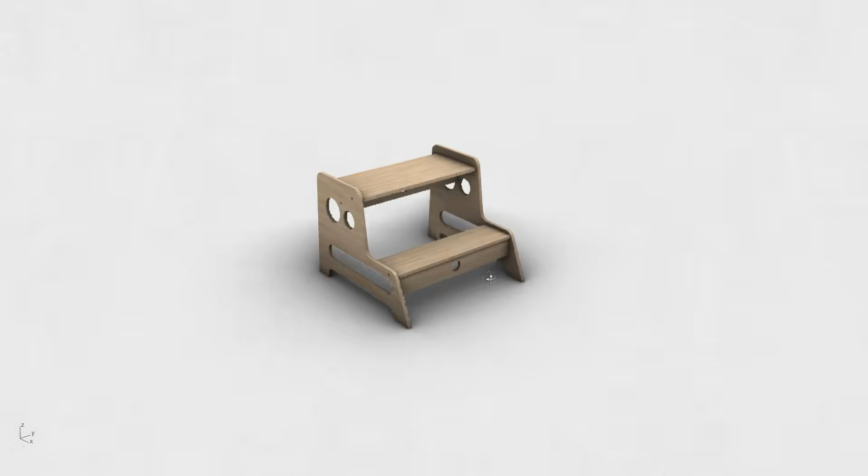Hey there! In this video, we're diving into something super exciting, modeling 3 awesome examples of flat pack furniture. Furniture where every piece is crafted with laser or CNC cuts from materials like plywood or metal, and then they come together without any extra hassle.

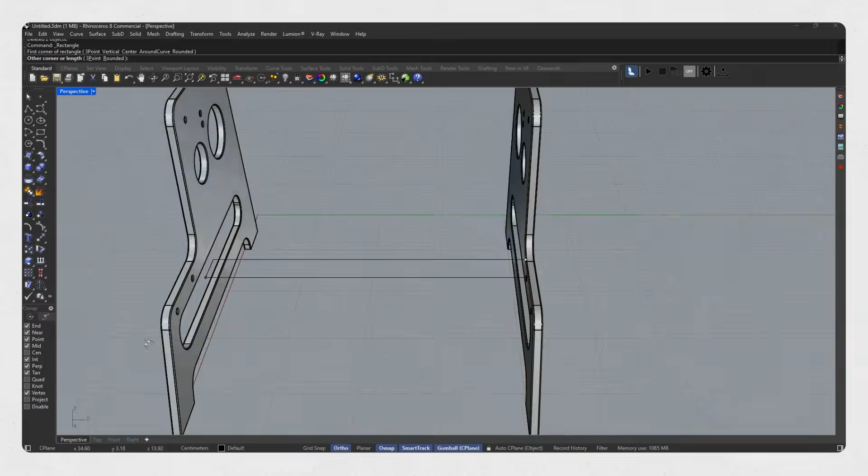We're going to take it step by step, modeling each of the 3 designs in all their glory, from the main shapes to where the joints go, and even the screws themselves. You'll see exactly how this type of furniture is designed and simulated. If you're into industrial design, architecture, fabrication, or precise modeling, this video is just for you. So, as always, stick with me and let's build these 3 cool models together from start to finish.

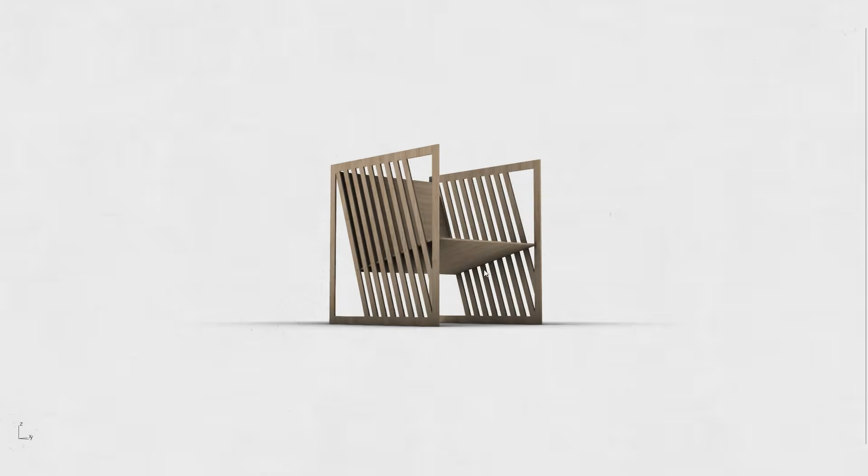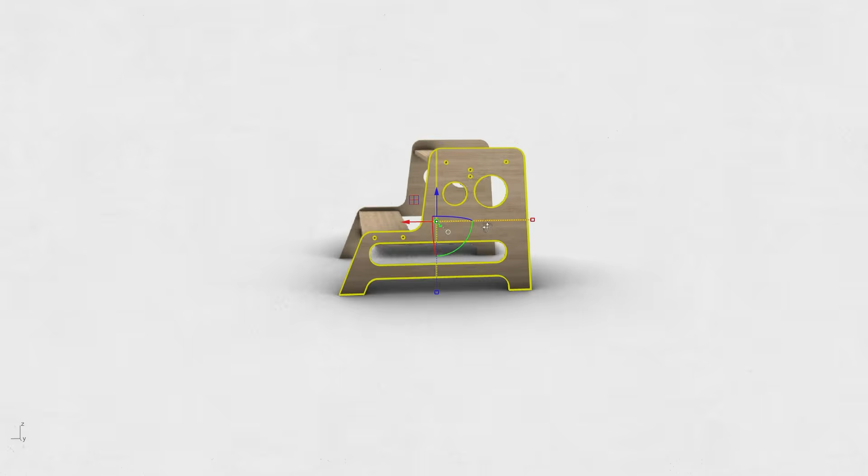In this video, we're going to model a few simple but super useful pieces of furniture together. Things like a small stool, a wall-mounted shelf, and a compact furniture. The models themselves are straightforward, but here's the catch: we're not just creating the overall shape. This time, we're going to include as many real-world construction details as possible. That means screw locations, holes, joints, and even the screws themselves. So the final result is a fully accurate model that's very close to how the actual furniture would be built.

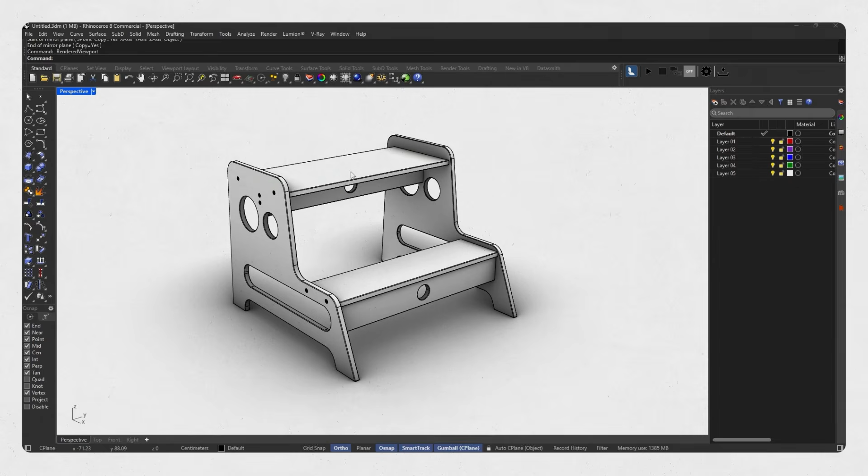Before we jump into the hands-on part, let me quickly talk about the idea of flat pack furniture, because understanding it really helps with the modeling process. Flat pack furniture refers to pieces that are manufactured and packaged as separate flat components, which the user later assembles on site. This approach has several major advantages. It reduces shipping costs and hassle, makes packaging much more compact, and even allows you to customize or replace certain parts. Because of these benefits, flat pack designs are perfect for small spaces, modern homes, and large-scale production.

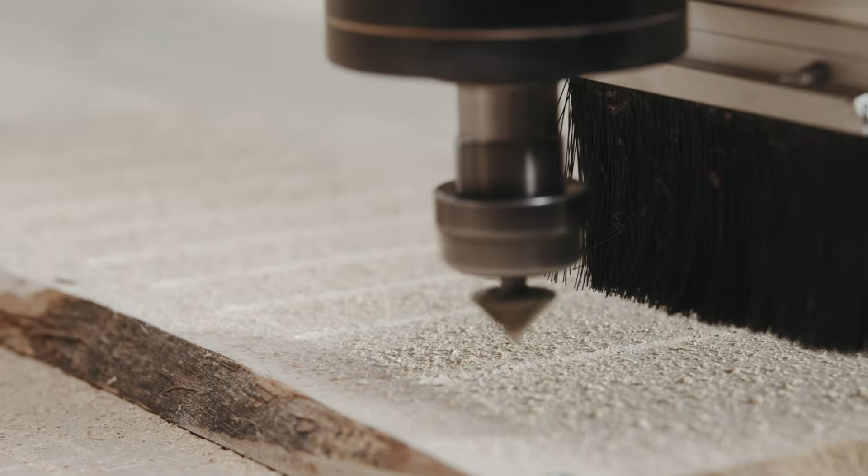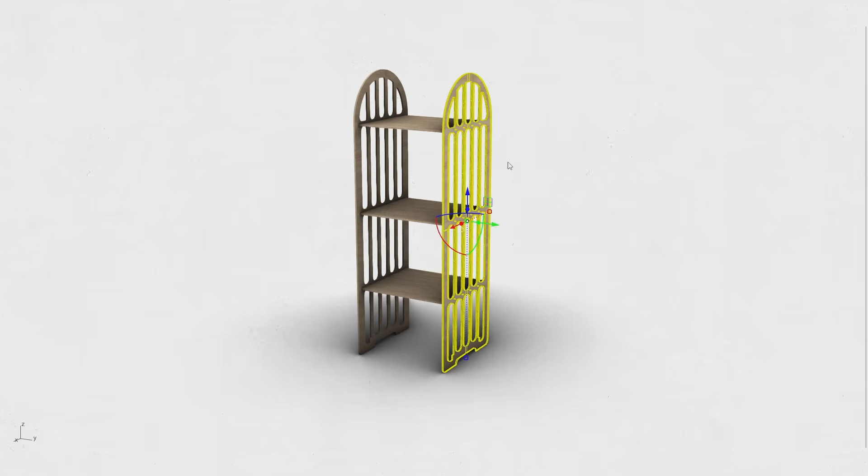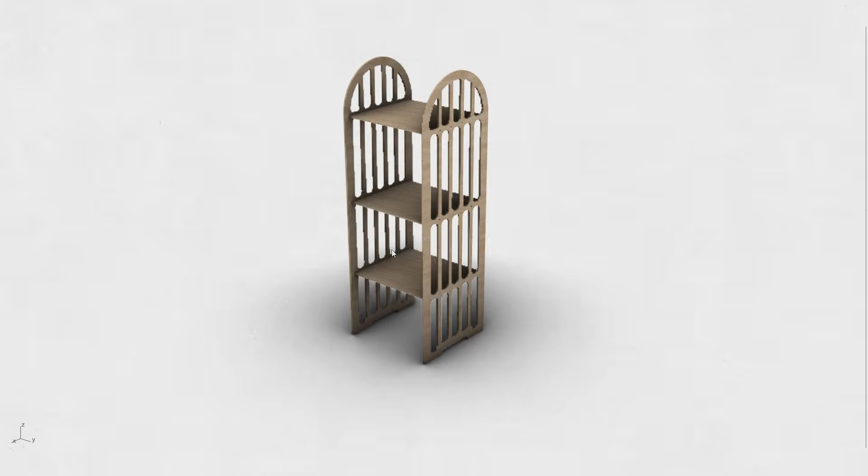These kinds of products are usually made using precise 2D cuts on materials like plywood, MDF, metal, or engineered plastics. Tools like laser cutters and CNC machines prepare the components with high accuracy, so when it's time to assemble, everything fits together like a perfect puzzle, often without the need for any complicated tools. This clever combination of 2D fabrication and 3D assembly is what makes flat pack furniture one of the most efficient and economical ways to produce functional designs. Alright, without further delay, let's get started.

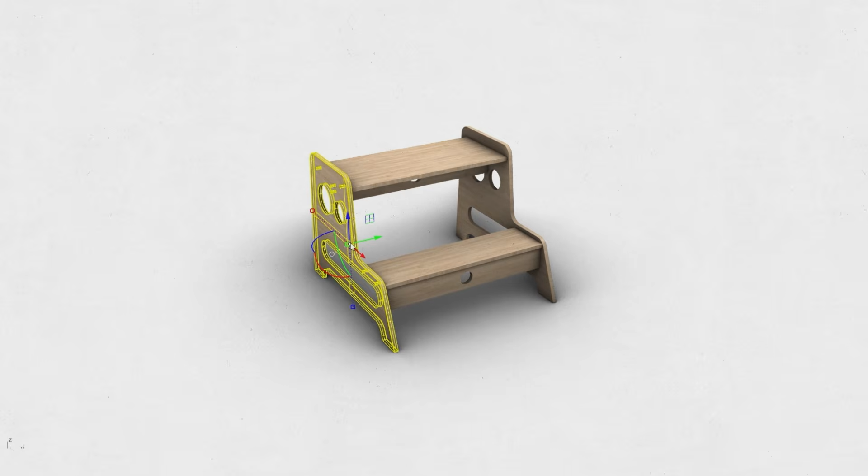Alright, let's jump into the first exercise of this session. The model we're going to build is a Toddler Step Stool, a small children's stool that's designed and manufactured in a flat pack style. As long-time viewers of the channel already know, there are 2 important principles we always keep in mind before starting any modeling process: don't panic, and simplify the form in your mind. Fortunately, this model isn't intimidating at all. The overall shape is very straightforward, and especially for those of you who've already tackled much more complex challenges in previous videos, this one will be totally manageable.

This model has 2 identical side members, plus a few inner pieces that make up the steps. So we'll begin with the sides. I start by using the polyline tool to trace the overall section of the side panel, exactly what you're seeing on the screen.

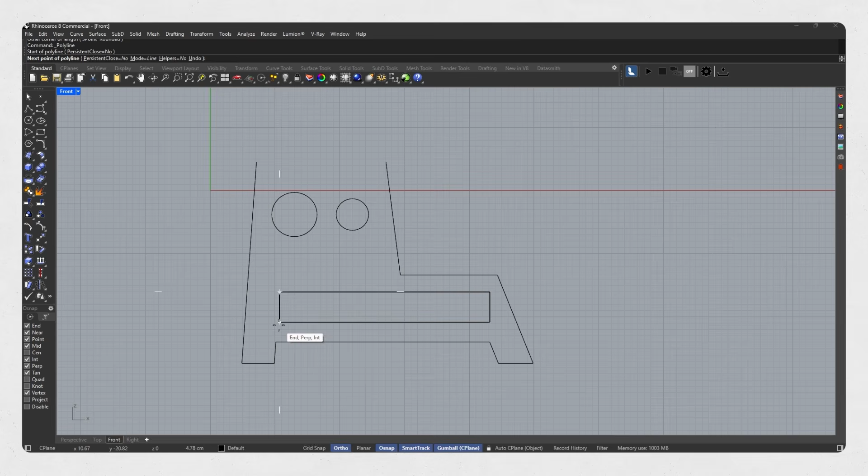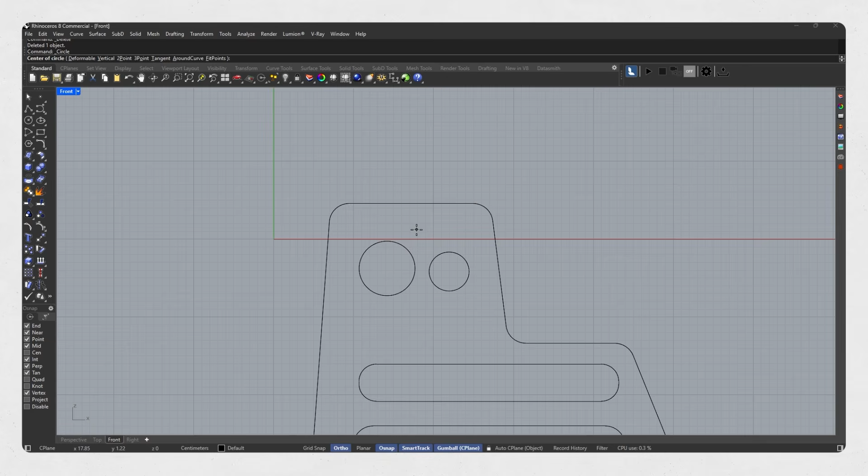Once the shape is drawn, I soften the corners with a small fillet to make it look a bit more realistic. At this stage, I also mark the screw holes because these little details make a big difference in the final quality of the model.

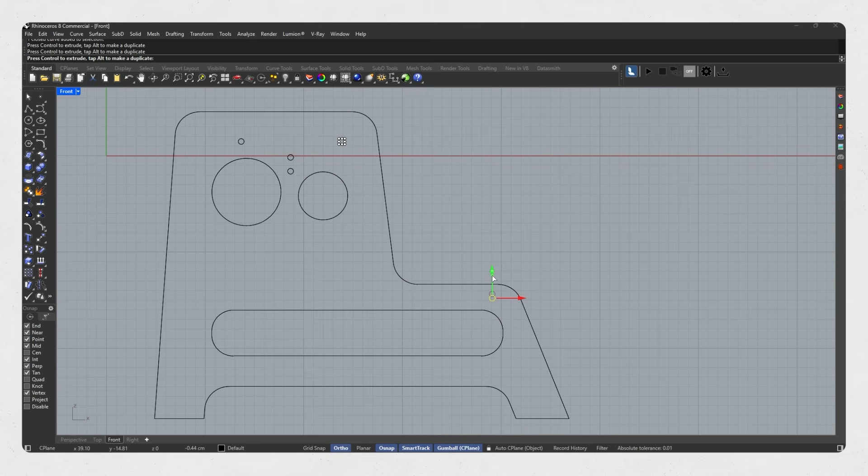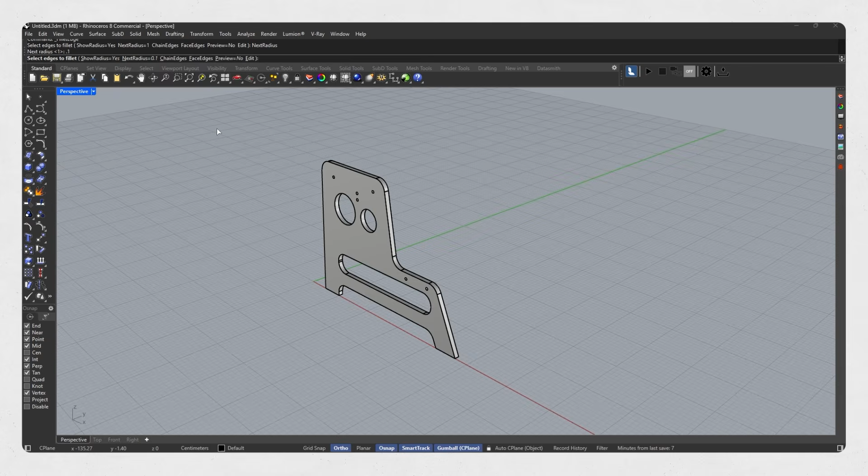When everything looks good, I use Extrude Curve to give the piece its thickness. Then I apply a very small fillet edge along the edges. For example, if the panel is 1 centimeter thick, a fillet of about 1 millimeter is perfectly enough and looks natural. These subtle fillets have a huge impact on how realistic the model feels. Now that one side panel is ready, I hold Alt, drag the gumball, and create a copy, placing it on the opposite side, exactly as you see here.

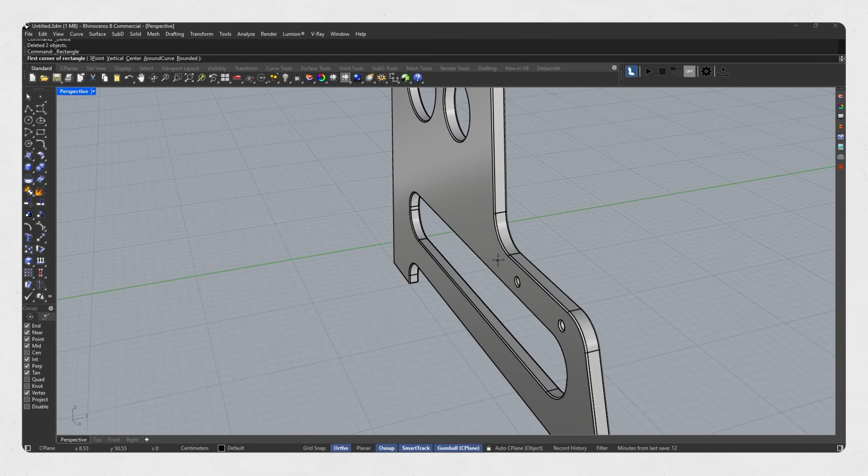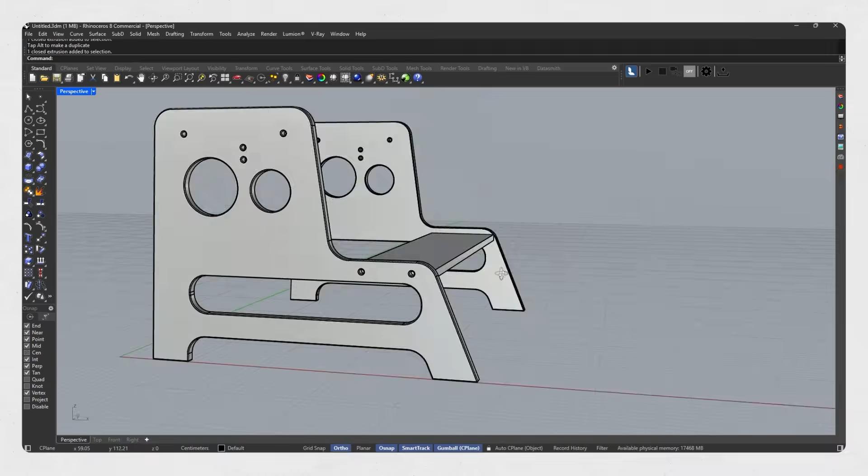Now let's move on to the middle pieces. Just like before, I start by drawing the cross sections of the middle parts based on the reference image, and then I extrude them. The logic here is very straightforward: the length of these pieces should match the exact distance we established between the 2 side panels. With the help of OSnap, it's easy to pick the key points accurately and avoid any mistakes.

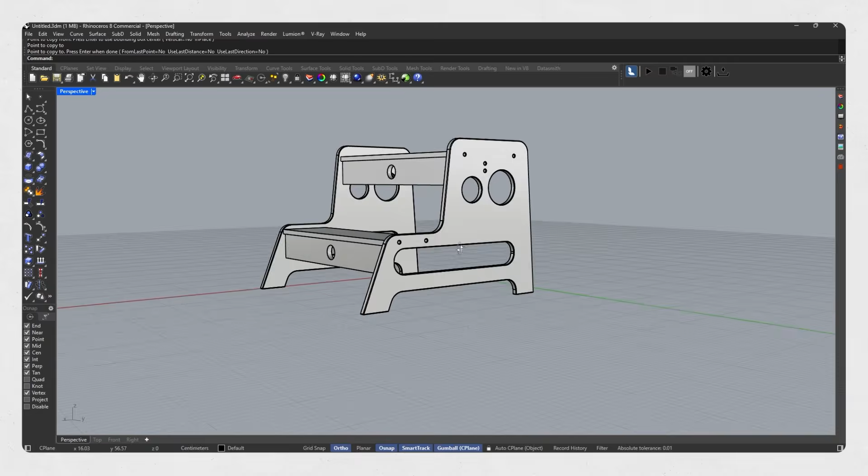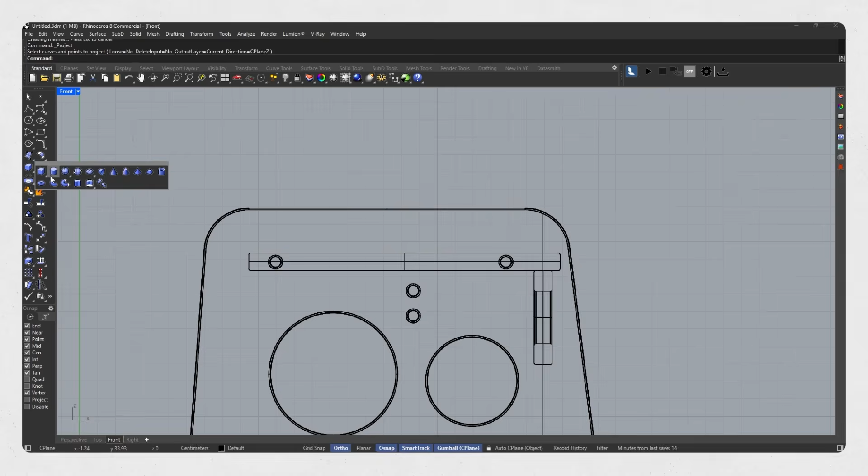Again, I add small fillets to the edges, so the model doesn't look overly sharp or artificial. Next, to create the screw hole locations on the middle pieces, I draw a small cylinder, position it slightly inside the geometry, and use Boolean difference to cut out the holes, just like you would see in a real manufactured product.

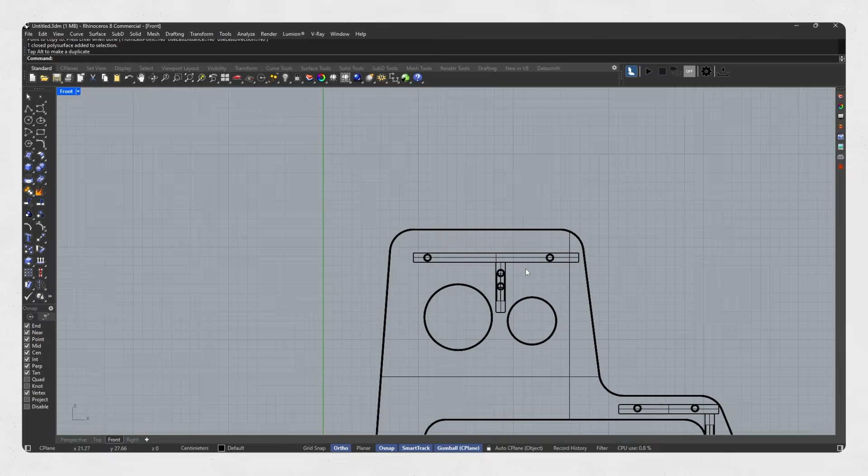I then finish the remaining details exactly as shown in the reference. Alright, now we get to the fun part, modeling the screws. First, I draw the screw profile to the specified dimensions, then use the Revolve command around the screw's central axis to create the main body.

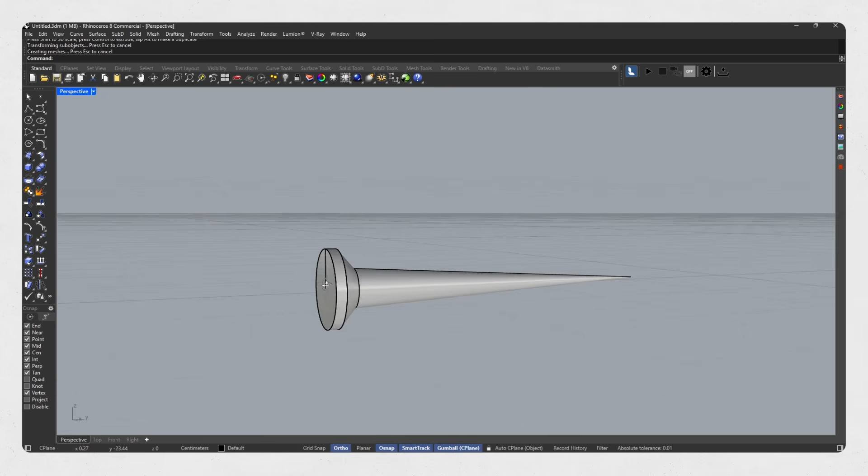To make the screwdriver slot on the screw head, I model 2 small boxes perpendicular to each other to form a plus shape, then Boolean union them into a single piece. I position that piece on the screw head and use Boolean difference to subtract it, which creates the screwdriver slot.

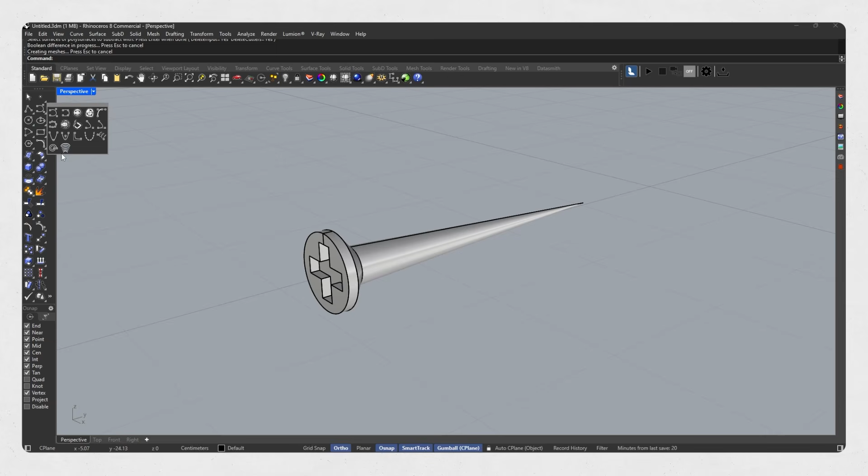Next, it's time to model the threads. I draw a spiral and extract the 2 main contours from the screw surface. I offset the helix, rebuild the curves for smoothness, and loft between them to create the thread surface.

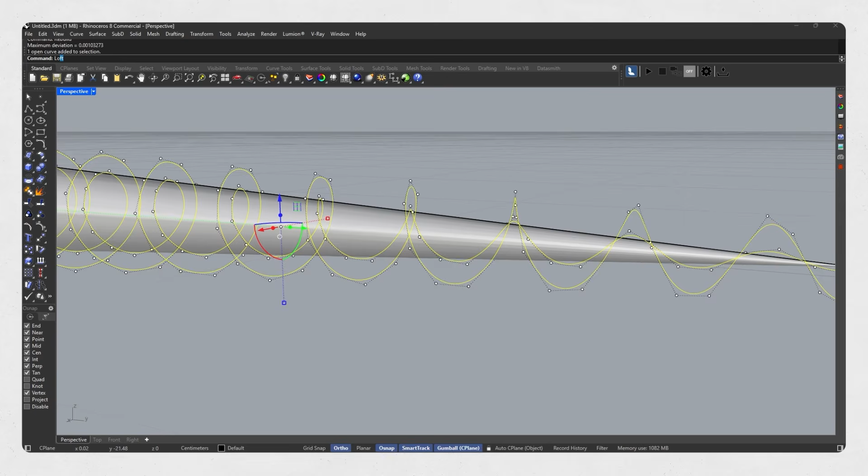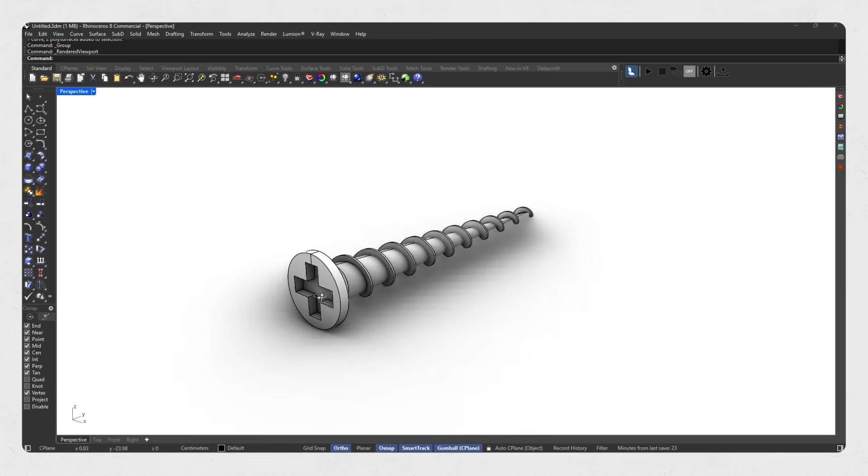Finally, I give that surface thickness using offset surface. At the end, I Boolean union all the screw parts so the screw becomes a single solid object. Now the screw is ready, I make several copies and place them carefully into their locations on the model.

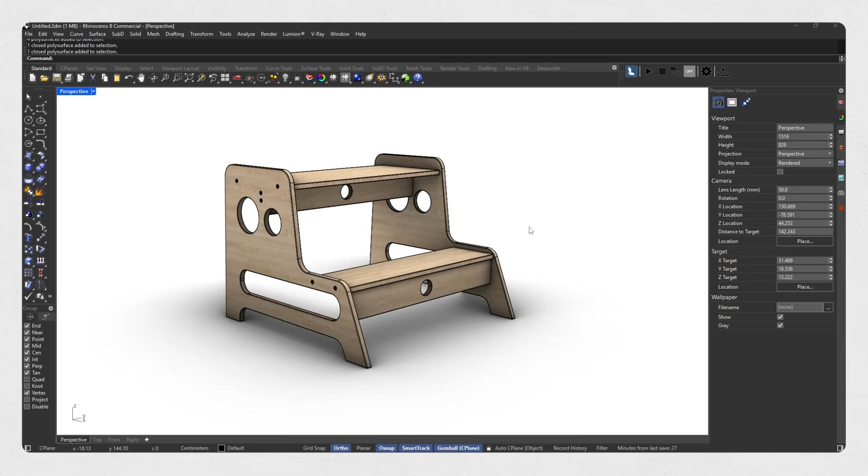And that wraps up the first exercise. If you're ready, let's move on to the next one.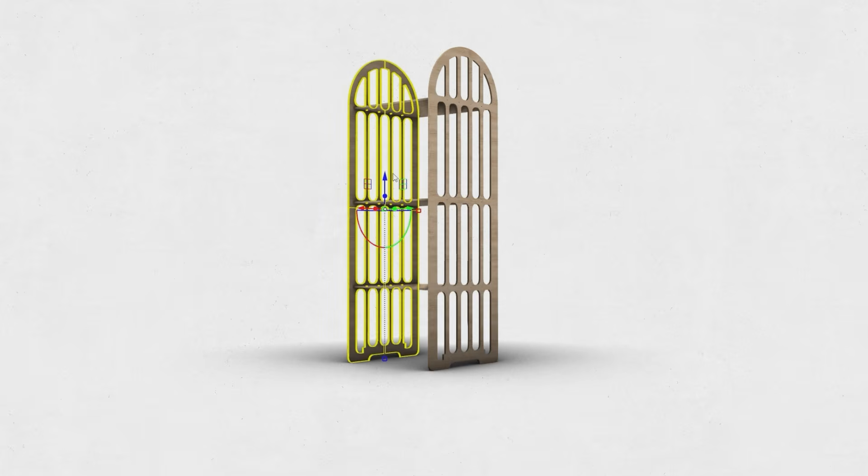Moving on to exercise 2, this time we're going to model a simple shelf or niche that, just like real flat pack examples, is made of a few flat pieces and assembled with screws. The workflow, in terms of logic and sequence, is exactly the same as the previous exercise. So I'll just quickly review the parts we already learned to save you some time, but the modeling process is exactly the same as what we did with the step stool.

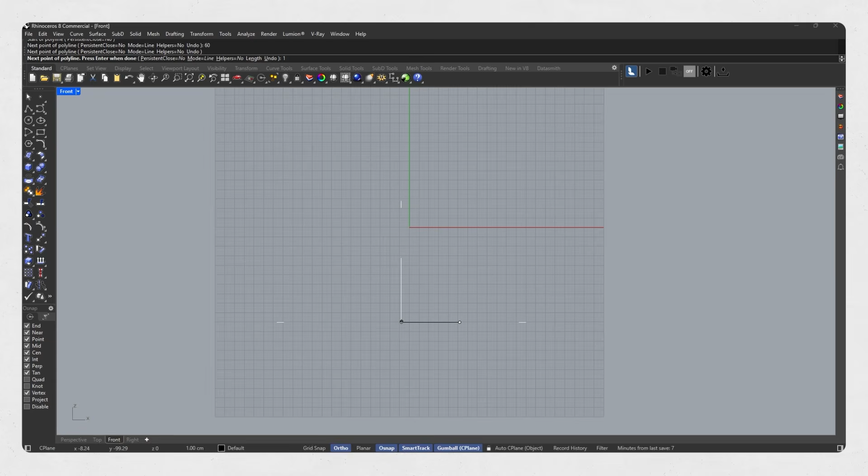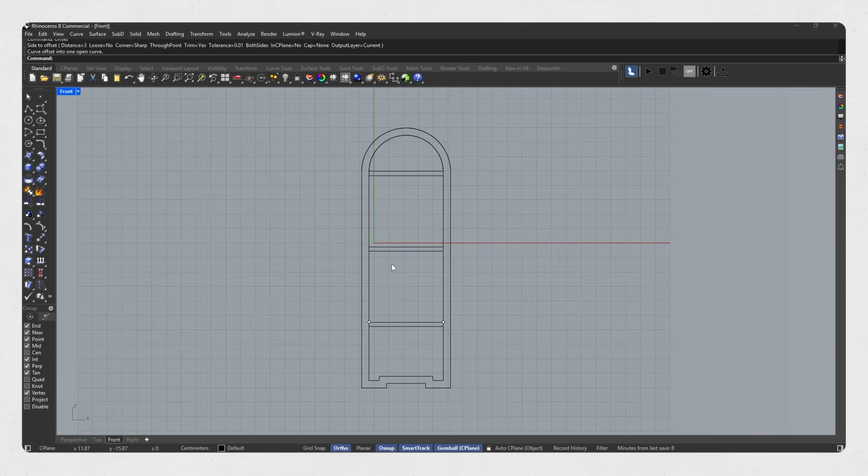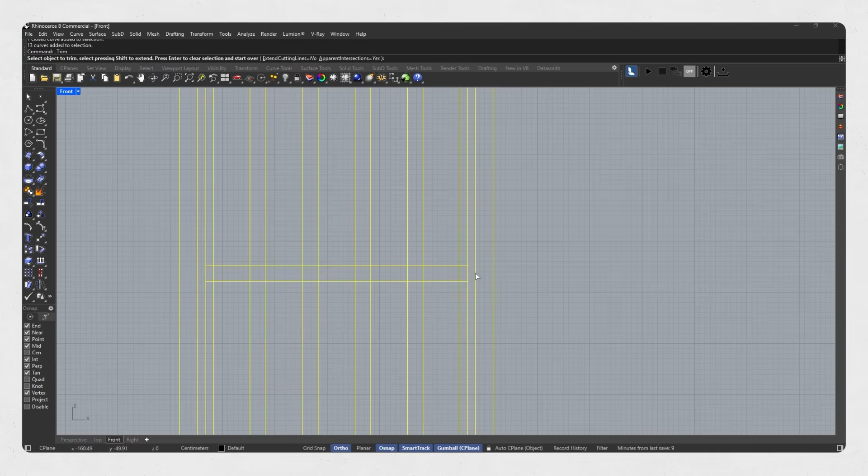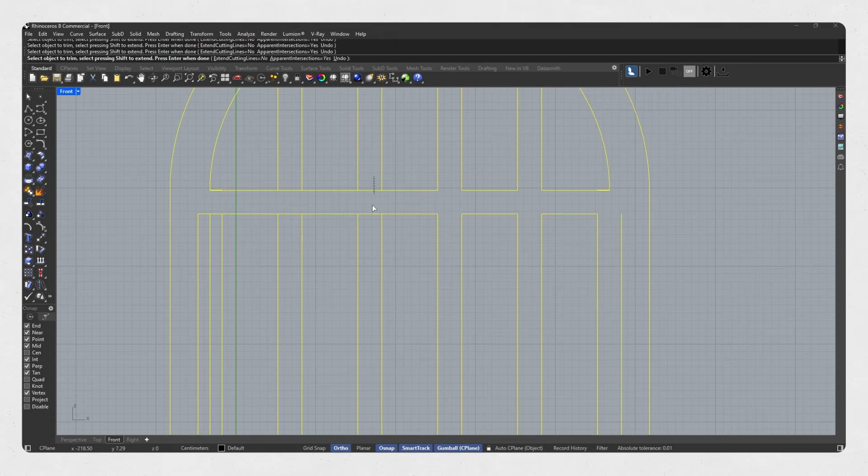Just like in the previous exercise, we begin with the side pieces. As you can see on the screen, I use the polyline tool to draw the side. I round the edges with a fillet and also mark the screw holes. Exactly the same method we used in exercise 1, so I won't go into the repetitive details.

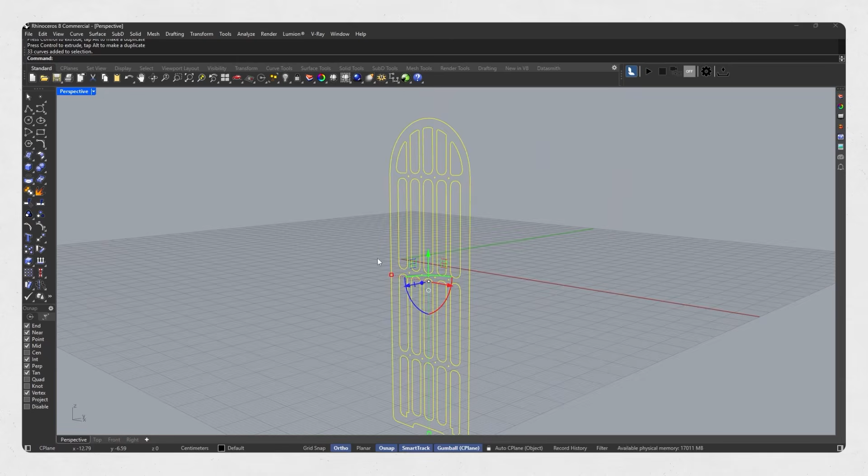Once the side shape is complete, I give it thickness using Extrude Curve. Finally, I apply a light fillet edge along the edges to take it out of the raw state and give it a more natural look.

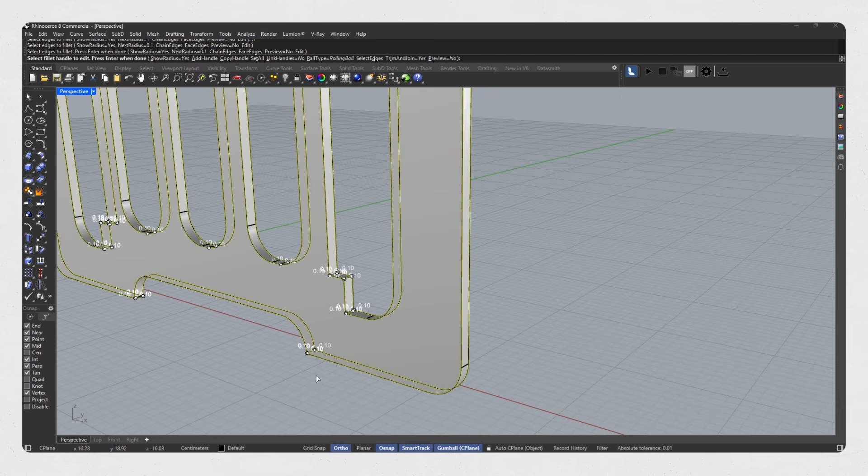Then, as always, I hold Alt and move the gumball to create a copy of the side, placing it at the desired distance so the main shelf form starts to take shape.

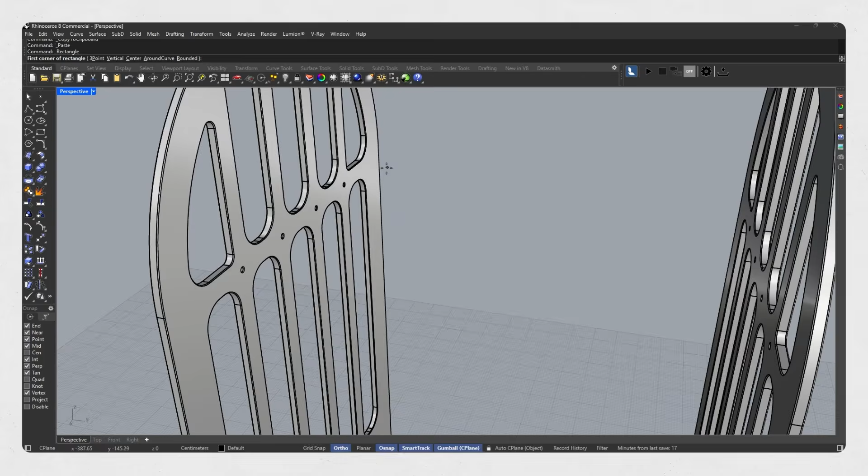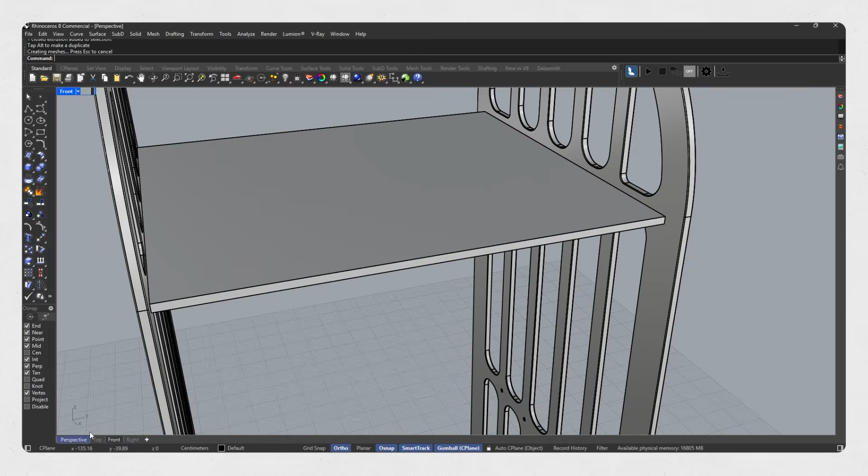Now it's time for the inner pieces that make up the inside surfaces of the shelf. The process here is similar to the previous exercise. I draw the cross-section of each piece according to the reference image, give it thickness using Extrude, and adjust the length of the piece based on the distance between the two side panels using Osnap to make sure it's accurate. Then I apply a fillet to the edges to take away the sharpness and give it a smoother, more natural form.

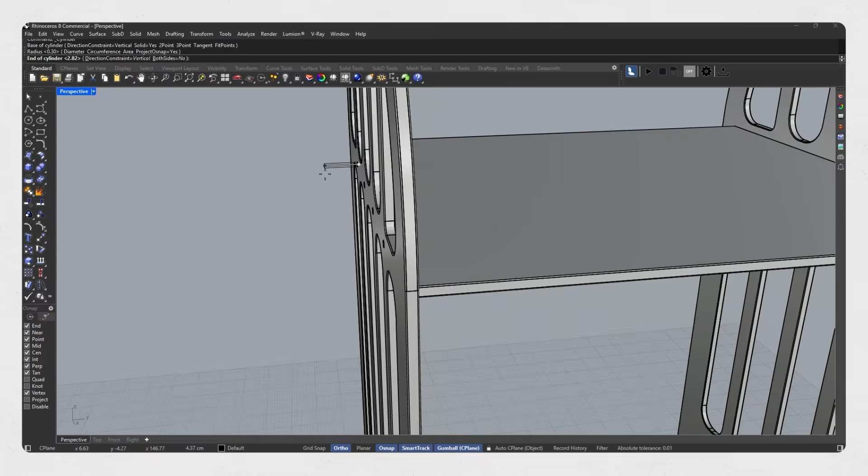I place each piece in its proper position, one by one, until the skeleton of the shelf is complete.

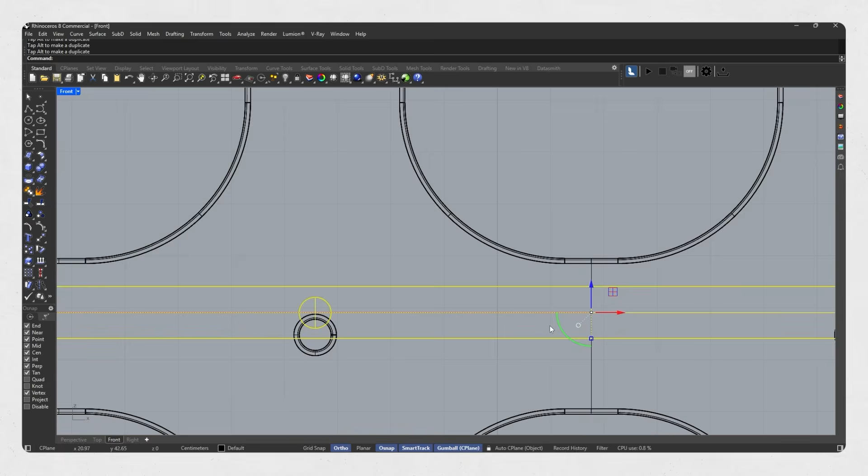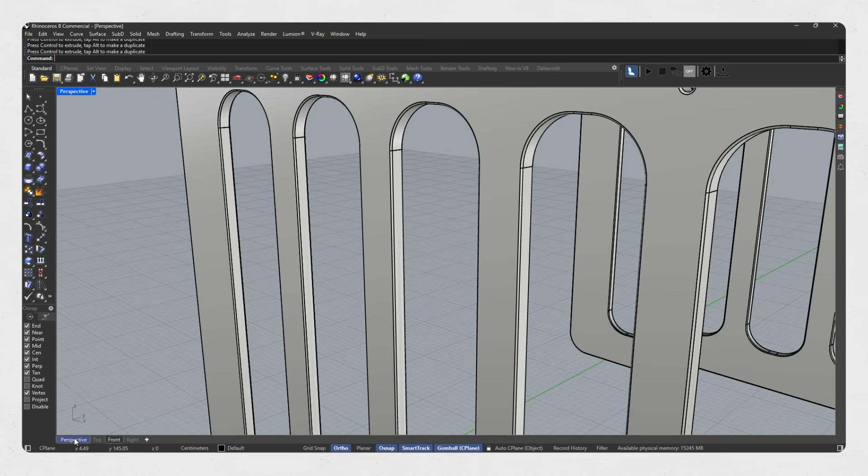Since we fully modelled the screws in the previous exercise, there's no need to recreate them here. We simply use the pre-made screws, make copies of them, then, following the connection points on the side panels and inner pieces, I place them carefully in their correct positions. This step goes much faster because the connection structure is simpler than it was for the step stool.

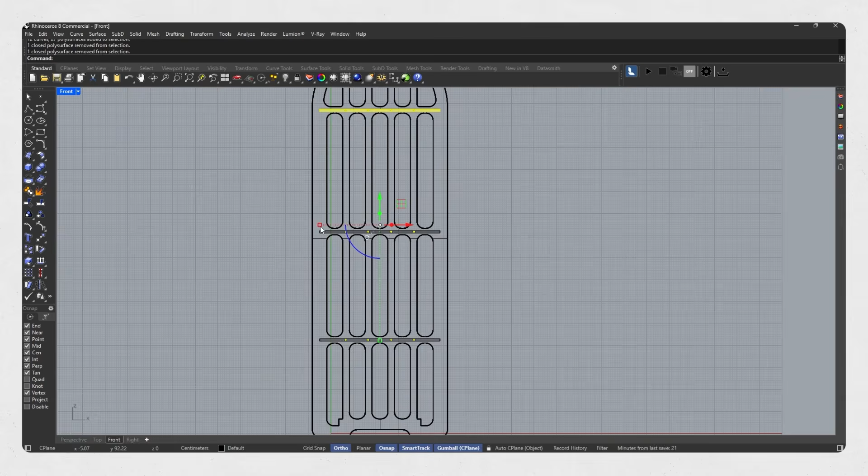At the end, just like in the previous exercise, I apply appropriate materials to the shelf pieces to make the model look cleaner and more realistic. And that wraps up exercise 2 successfully.

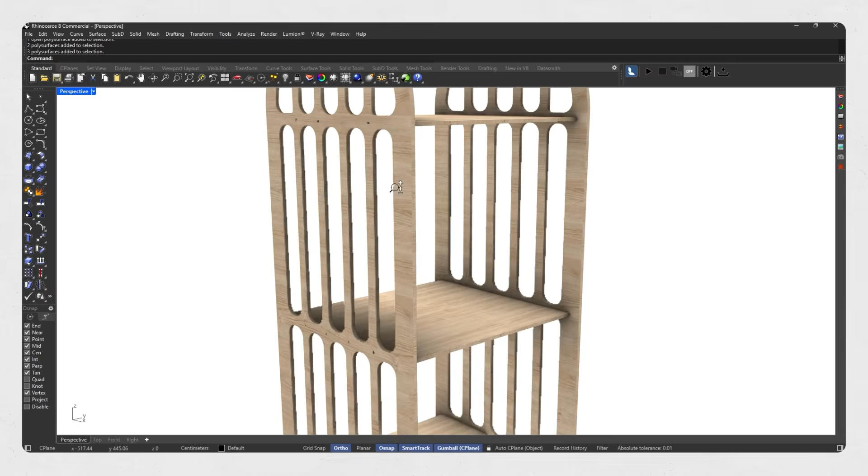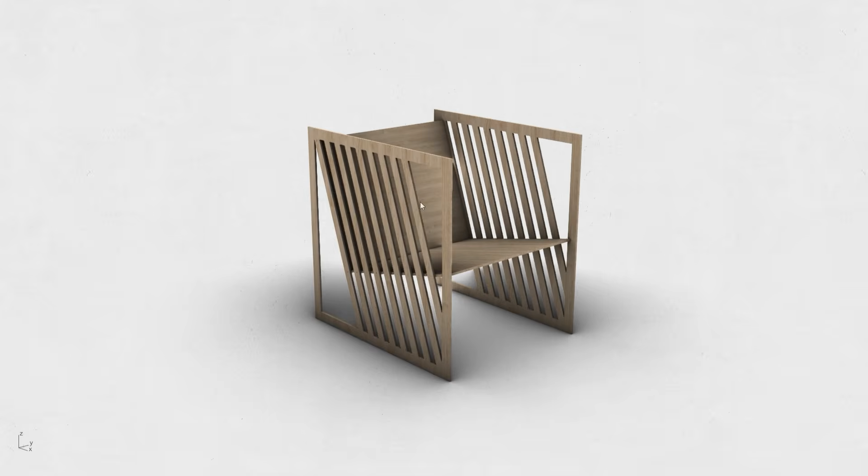Moving on to exercise 3. This model, like the previous two exercises, is a flat pack furniture piece, and the overall workflow isn't fundamentally different. However, it has a few smaller, finer details that make the final result look more realistic.

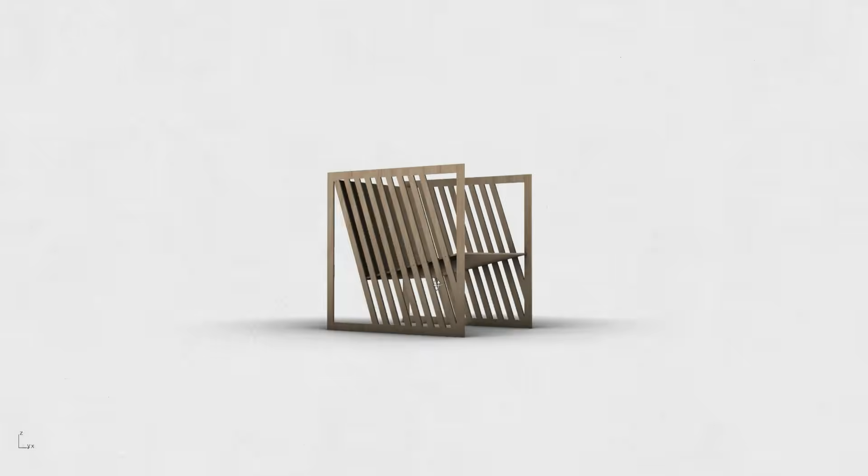As always, we start with the side of the furniture. As you can see on the screen, I first draw the side's cross-section, then I give it the desired thickness with extrude.

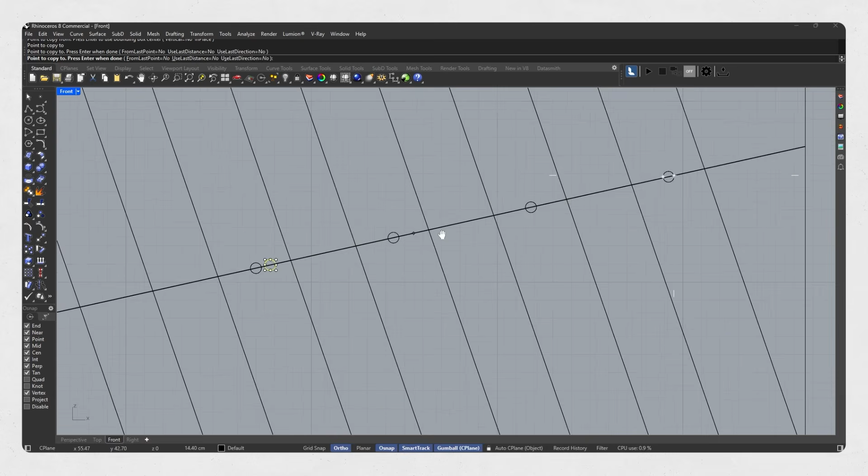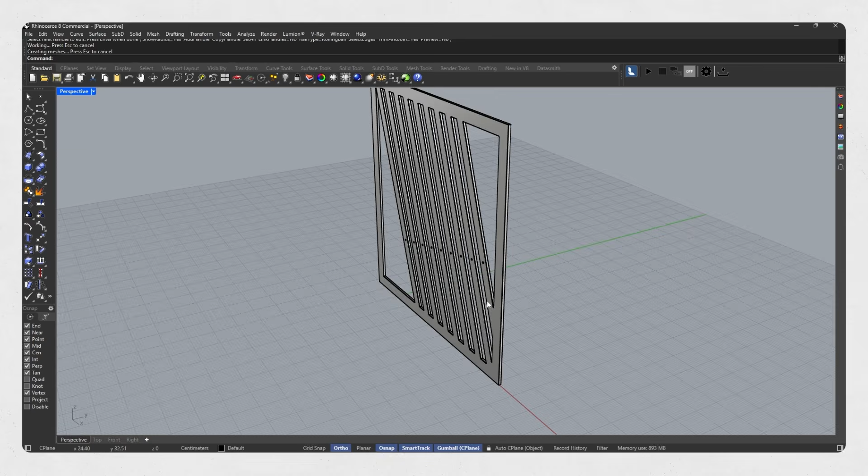Next, I move on to the initial details, rounding the edges with fillet edge, fixing sharp corners, and marking areas that will later be used for connections. Once the first side is complete, just like in the previous exercises, I hold Alt and use the gumball to create a copy, placing it at the appropriate distance for the width of the furniture.

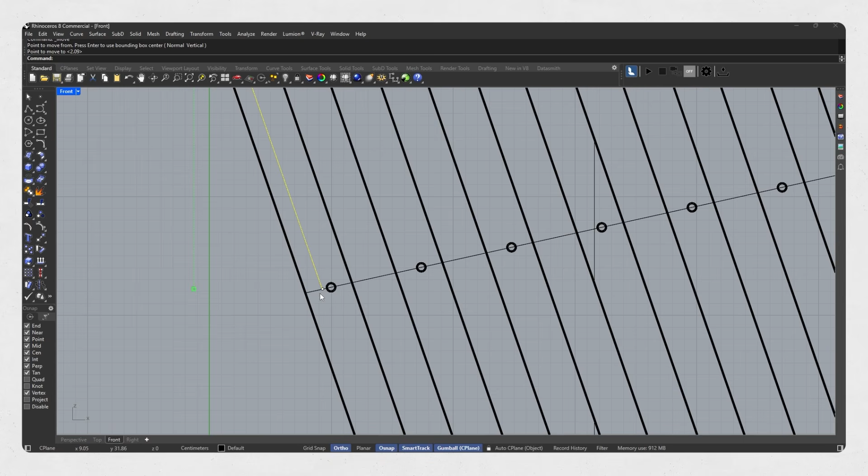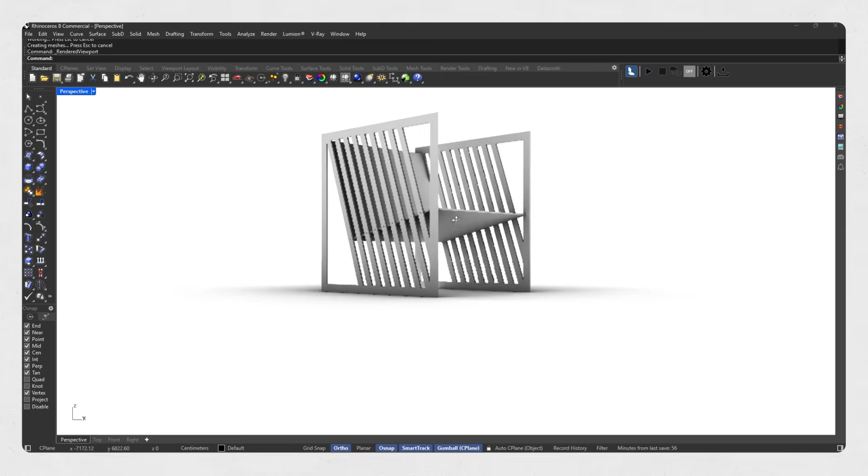Now we move on to the inner pieces, the parts that complete the main form of the furniture. The process is the same as before. I draw the cross-section of each piece, give it thickness using Extrude Curve, apply fillet to the edges, and finally adjust their orientation so they fit correctly between the two side panels. This step may require a bit more precise rotation or positioning, depending on the furniture design, but using Osnap and the gumball makes it very easy.

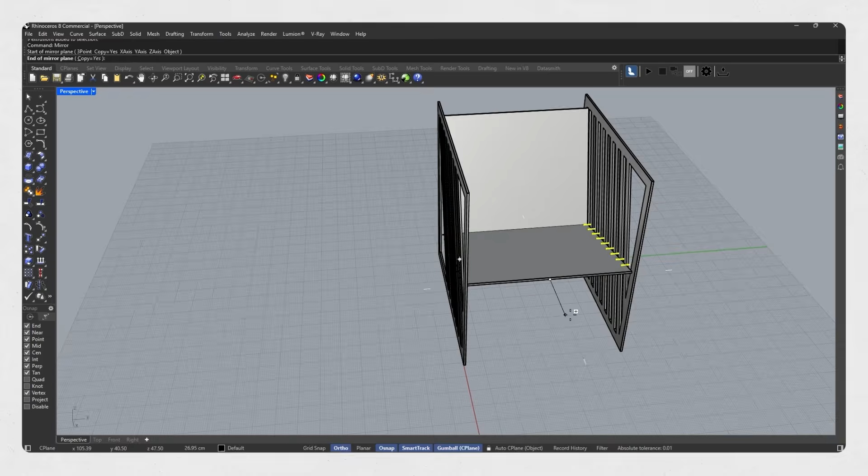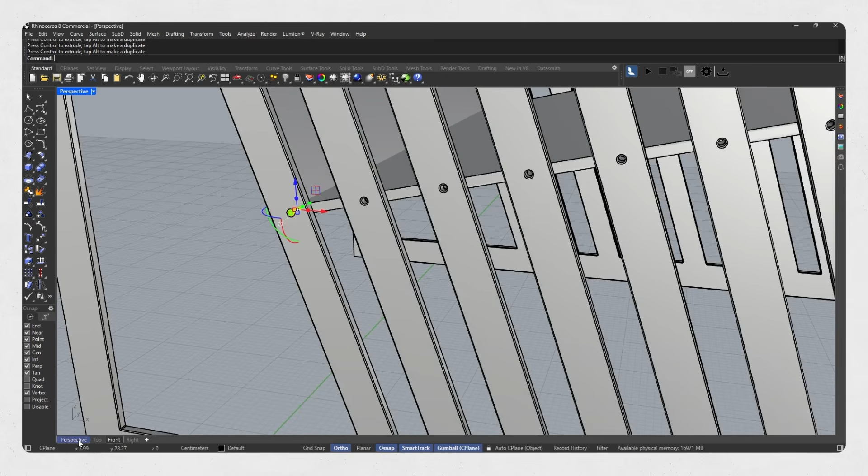At this stage, just like in the previous exercises, I use the pre-made screws that we modelled at the beginning of the video. All I need to do is make a few copies and place them very precisely at the connection points marked on the side panels and inner pieces. This not only makes the model look more realistic, but also gives the final render a more professional touch.

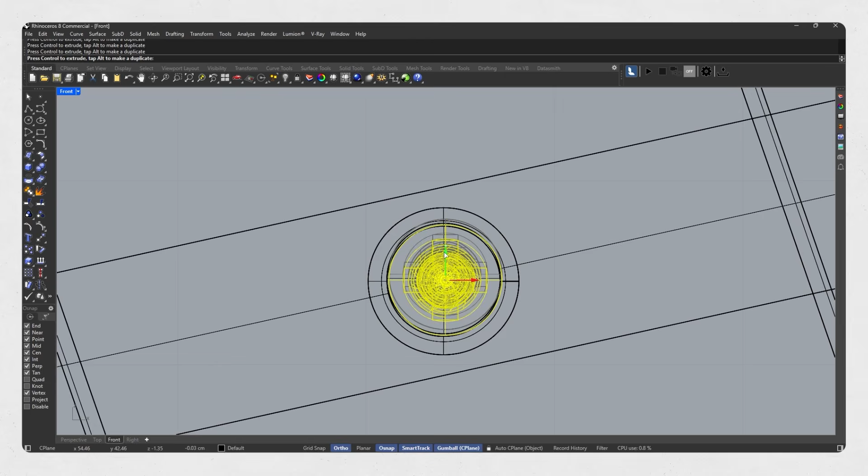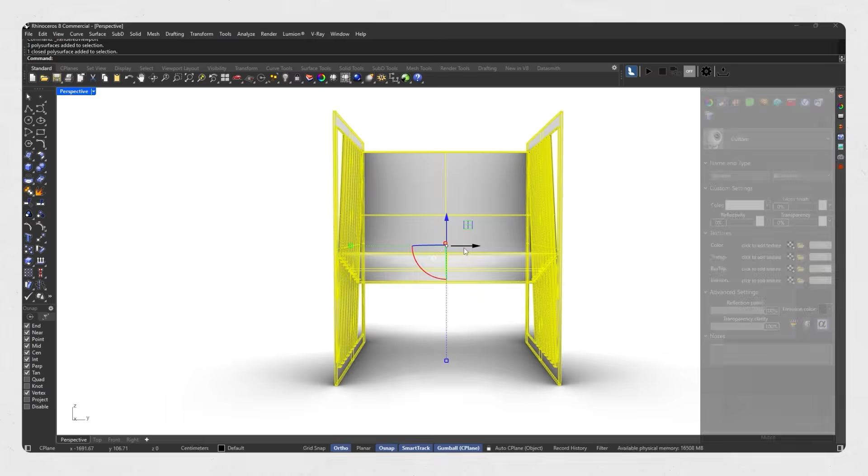At the end, I apply appropriate materials to all the furniture pieces to make the model look polished and ready for rendering or presentation. As I mentioned earlier, there's a separate video on the channel that covers viewport settings, lighting and materials in detail, and I've included the links in the video description.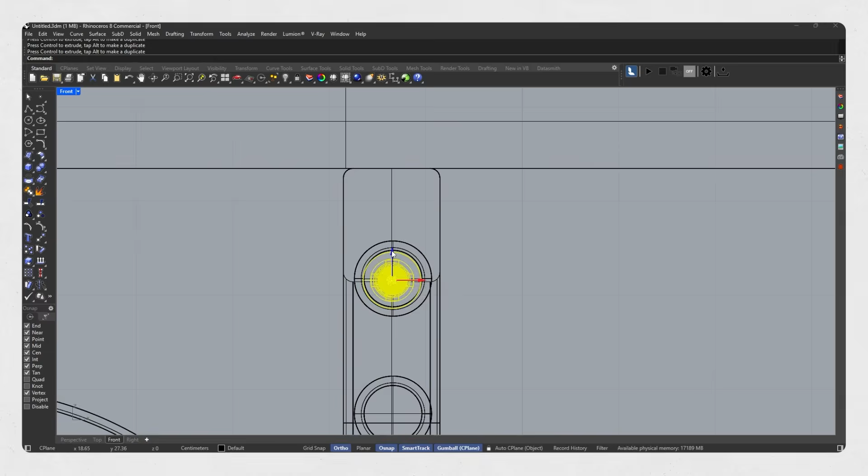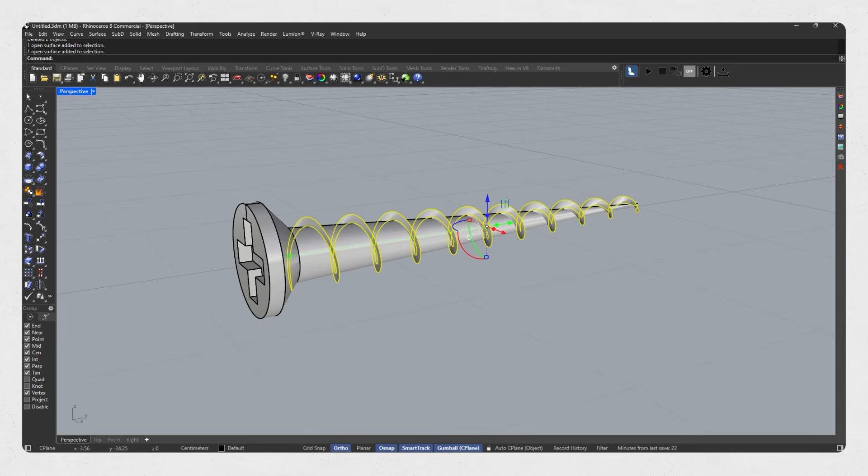So far, we've built three popular flat pack models together, from the Toddler Step Stool to a simple shelf, and finally a compact sofa, each adding a new feature to our learning process. If you follow these three exercises carefully, you'll have learned a significant part of the flat pack furniture modeling workflow in Rhino. From now on, whatever design you see, whether it's a shelf, a table, or a chair, you'll be able to break it down piece by piece and create its 3D model.